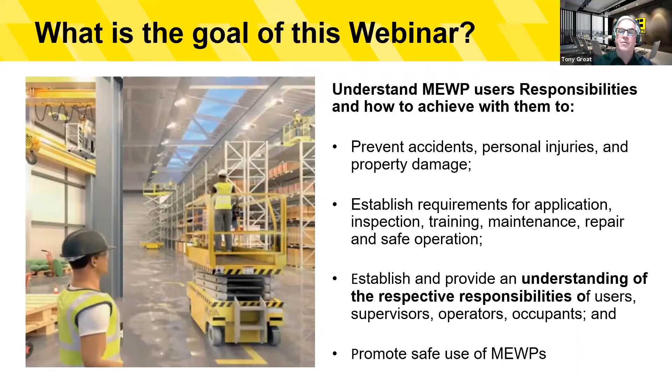While there are other responsibilities within the standards, such as for manufacturers or for owners of the equipment, we're really not going to address those during today's sessions and focus exclusively on the responsibility of users and their subsequent operating personnel. And all of this to promote the safe use of powered access equipment.

In addition to the safe use responsibilities in the standards, IPAF accident reporting data can provide MEWP users some insights into the range of issues that they must also consider when they're developing a MEWP safe use plan. Our 2016 to 2018 lost time incident report that you're seeing on the screen is part of that information that we have provided in our reporting.

Here you can see that we've identified 12 types of incidents that are known potential hazards. You can read more about the accident report by visiting our website that's on the screen here, www.ipaf.org/accident, and read more about accident data for your further information.

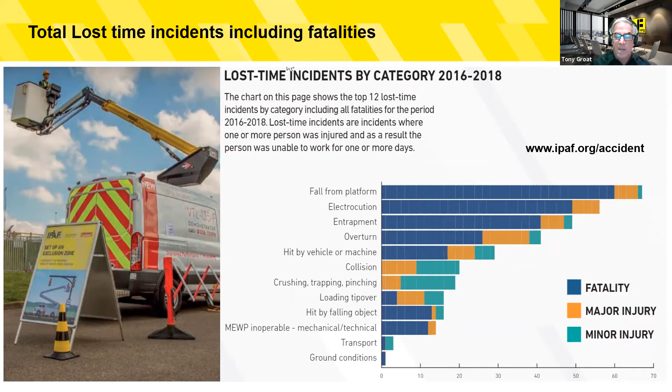So we're going to talk about industry standards, and standards are basically just an agreed way of doing things. Our industry standards are also commonly referred to as industry best practices.

In December of 2018, we published a suite of standards, the Design, Safe Use, and Training standards that went into effect June of 2020. So all of these standards are now in effect. And today we're going to focus in on the A92.22 Safe Use Standard and its respective training standard that associates how to train on that material, the A92.24.

These equally correlate with the Canadian standards, the CSA B354.7 for safe use and the CSA B354.8 for training. Very, very common, but there are a few differences, and we can point those out as we move forward.

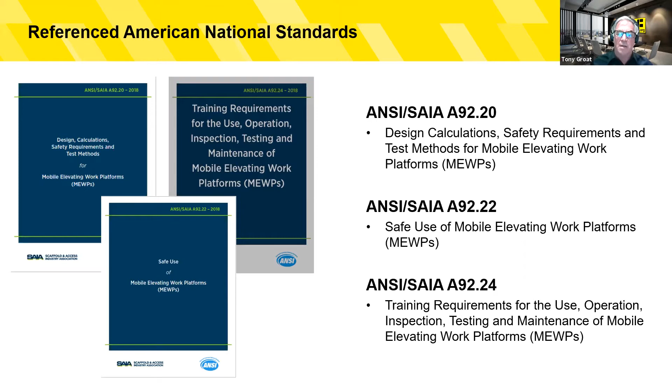So what we're going to do today is go through the standard and look at the different elements within the standards and give you an understanding of what those responsibilities are. And standards provide definitions that are unique to the standard.

As an example, a user is defined as an entity who has care, custody, and control of a MEWP. I can assure you, if you go to a Webster's dictionary and look up user, that's not the definition you're going to find.

So that's why you see the value of the definitions within the standards, because they provide a unique definition for terms that apply to our specific standards. Now, a user has care, control, and custody of it, and they're typically the employer of the MEWP operator. And a user may also have other responsibilities.

So, as an example, a dealer, who is normally a rental company in most cases, has their own set of responsibilities. We're not going to address those specifically in today's presentation, but a dealer is also a user because he has drivers and mechanics or even sales personnel who will operate that equipment. So they're a user, and they also own the equipment, so they have responsibilities as an owner.

And those elements could be true for any user. So if you have responsibilities outside of what we're going to talk about today, we're going to have to reflect on those responsibilities in the standards. We're going to just focus in on user responsibilities today.

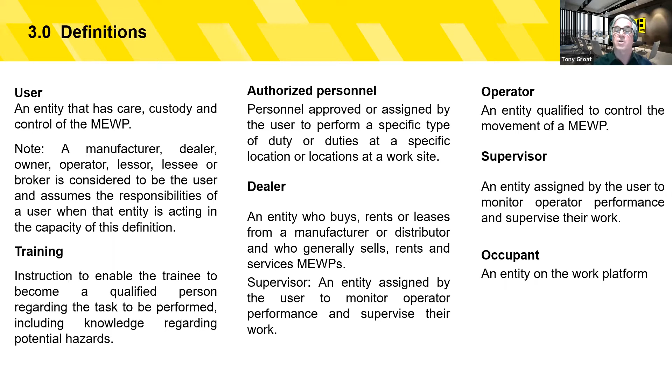Thank you, Tony. We want to start by describing that although standards provide the specific responsibilities, and as Tony mentioned, a compilation of best practices, we need to recognize that not all the conceivable issues that you may face on safe operation will be there for consideration. So it is important that we take this as the baseline, but there may be other aspects that you want to consider when you are planning to do your activities and making sure that equipment has the right integrity before it's selected to do the job.

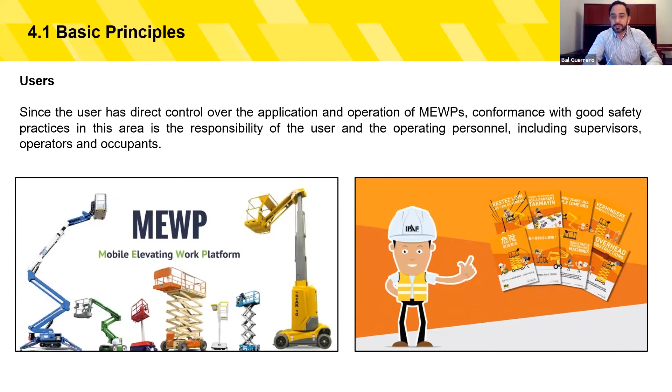And I know it looks overwhelming, but I want to just link this. If you think in general safety, in anything that is done at the workplace, you always are considering what is the risk that the activity I'm going to do will bring to that person doing the activity or a group of persons. What is the risk of the actual environment where I'm going to do the activity? What are those risks that will be out there?

The worker using tools and equipment, the conditions of those tools and equipment, and the way they operate, how does that affect the overall risk of the activity? And then knowing how to do the activity in the best possible way, which will translate into a proper execution and a safe execution. So training is so critical, knowledge and having the experience.

As Tony said, just going through the training doesn't mean that someone is a competent individual. And then there are barriers in case things go wrong. So I was giving you just a layout. If you go to general safety, that's how you think about how to make a safe use plan.

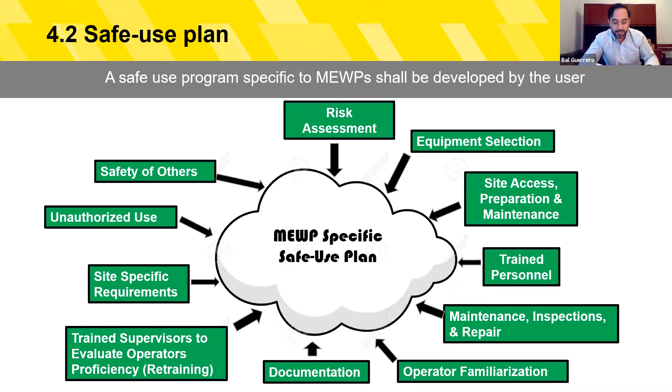So just wanted to make sure you hear a little bit of context on how what you see here, while overwhelming, may not be different to what you're doing to stay safe in other activities in your workplace. So moving to the next slide, Tony.

So it's pretty important to keep in mind that to have access to information, we've got to have a way to get that information in our hands, in the hands of the operators. In this case, what the standard is suggesting as the best possible way is having that manual in place that will allow that. This is critical as well for the familiarization with the make and model for the safe operation of this equipment. So moving to the next slide, Tony.

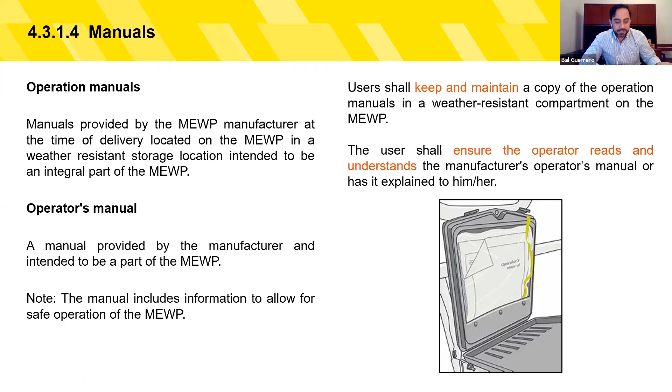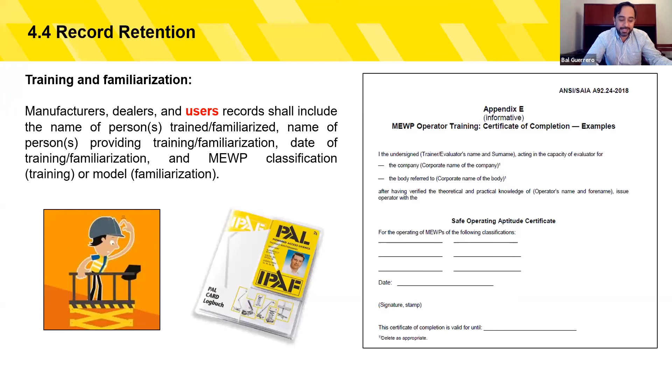While training records are pretty common and have established more and more as a best practice to understand people are aware of how to properly do an activity, familiarization is not necessarily as common to be documented. We can see here that manufacturers, dealers, and users should have this process established where there is familiarization, and this familiarization should be documented. So we have a way to go back and confirm that we systematically are providing the information that the people using the equipment needs to do it safely. Moving to the next slide, Tony.

Just want to make sure you see as well that, as in any other piece of equipment, but more critical because this piece is going to be providing power access, is going to be lifting people - modifications to the equipment may create an impact on the integrity of the equipment. That's why it's critical that any modifications should be in line with what manufacturers are saying modifications can be, and can only be done if manufacturers are actually providing approval to do those. Those are recommended by the standard and should not be done more than that for the owner of that piece of equipment. So just being very aware that any modifications can compromise integrity, and that can create a significant risk for the people using the equipment. It's key.

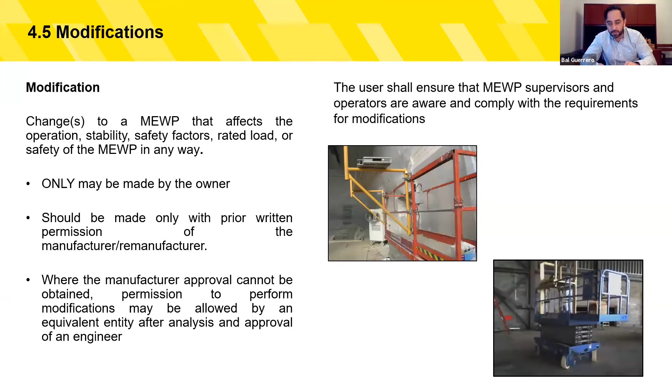Then moving to the next slide, as again, just translating what we are reviewing in the MEWP activities to general safety - maintenance of the equipment is also pretty critical. Maintenance and inspecting the equipment - maintenance is going to let us know if the equipment has the best chance to stay and remain safe when we operate on it. Inspecting them is going to help us make sure the integrity hasn't changed, and that can be a regular inspection, but then before the job that also becomes critical.

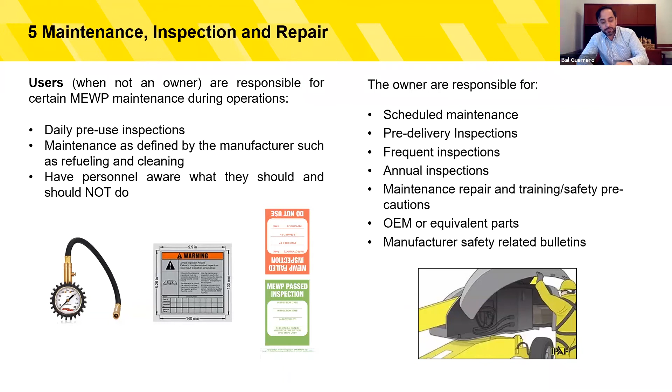So you can see here how there is responsibilities on the owner side as well as in the users. On the owner side, for example: scheduled maintenance, pre-delivery inspections of the equipment, frequent inspections, and the annual inspection - fundamental. But then the user needs to make sure, as I said, before the equipment is used, the daily pre-use inspection is a very important part. So maintenance inspections are critical, as in any other equipment as well.

Moving to the next slide, then we're talking about the context of risk assessment, and you know it's a key part of the operation. An assessment should include identifying what is going to be done, as we saw in the graphic, selecting the appropriate equipment for the task. That should consider as well the environmental aspects - can be the conditions of the terrain and other aspects as well. Then what will be the control measures that we're going to implement to stay safe for the activity we're going to do.

And the best practices that we know are more likely going to keep us safe. Those are the procedures of how to stay safe in that same activity. And that's combined with what we learn once we are in that environment. And what if things go bad? What if the equipment stops working or something goes wrong?

We need to make sure that risk assessment includes rescue from height, and that the result of this risk assessment is properly communicated to those that are going to be involved. The user is responsible to ensure that there is a risk assessment performed by qualified personnel. And as Tony mentioned, qualified has a definition, and we're going to continue talking about that.

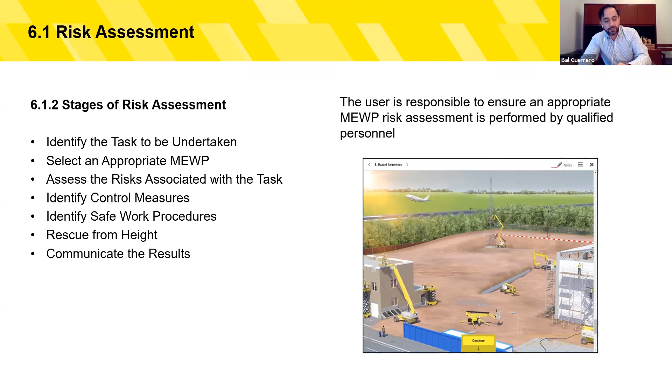Moving to the next slide, when we talk about personal qualifications and training requirements, too often training by itself is considered the only tool required to achieve the title to be qualified for a task. But that is just a piece of the equation. The ultimate goal is really the evaluation of the user, that the individual is qualified for the task that is going to be performed. That is the key, right?

Just training is the beginning of the journey, but qualifying that individual to actually safely operate that equipment is the end goal. So before training, users must ensure that candidates are both physically and mentally capable for MEWP operations, especially because they're going to be working at heights and with power equipment. And if the person is afraid of heights, likely they will not be a good candidate to be a MEWP operator. It's important to review that.

It's not the same, even if there is a MEWP operator already qualified, to be doing an activity at 20 feet versus doing 120 feet. That affects things differently. And even when they show you those credentials, that doesn't mean they are qualified to do the activity.

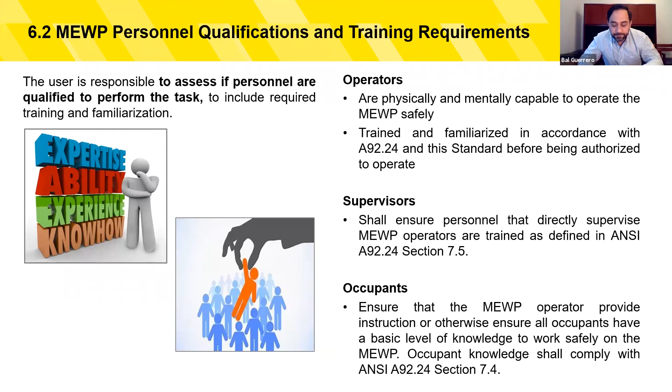It's important to think as well, moving to the next slide, that there may be questions. People may have questions when they are in their journey to learn how to safely operate equipment. So the operators need somebody who will answer those questions. That's why the standard mentions the user must have in their plan a means for the people operating the equipment to communicate any questions they may have, and ensure that the operator gets the information they need so they can operate the equipment safely.

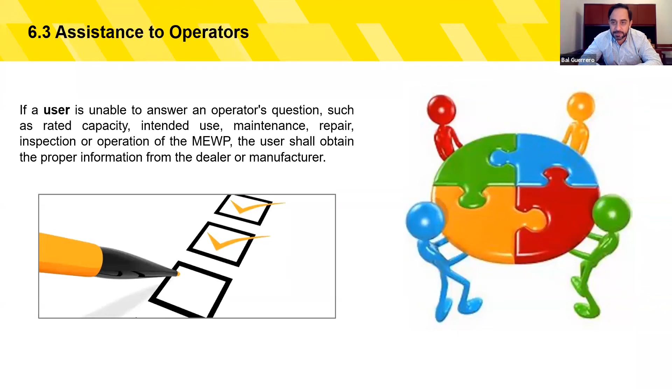So we just went through information that is critical on how to do a safe use plan and some of the training qualification aspects. But I'm going to pass it back to Tony now, who is going to cover other key aspects, including what we do before operation. Over to you, Tony. Thank you, Bal.

As Bal has just described, we've gone out and developed a safe use plan. We've done our risk assessment. We've gone out there and evaluated our employees and made sure that they're properly trained. And now let's go to work. So what do we need to do? What's the next step, even though we have those things in process?

Well, having a safe use plan is useless if the only one who is aware of the plan is the person who wrote it. So having it sit on the shelf in the office is a useless tool. The plan must be communicated, understood, and followed by all persons involved in the MEWP operations, to include MEWP supervisors, operators, and occupants as needed.

This is not a one-time responsibility at the very start of the job, but an ongoing one, as personnel can change on the job during the course of it. The user must ensure that compliance is taking place every day on the job. So there has to be an assignment of supervision to monitor, supervise, and conduct ongoing evaluations of the competency of the personnel on the job performing these tasks. This is all part of that safe use plan.

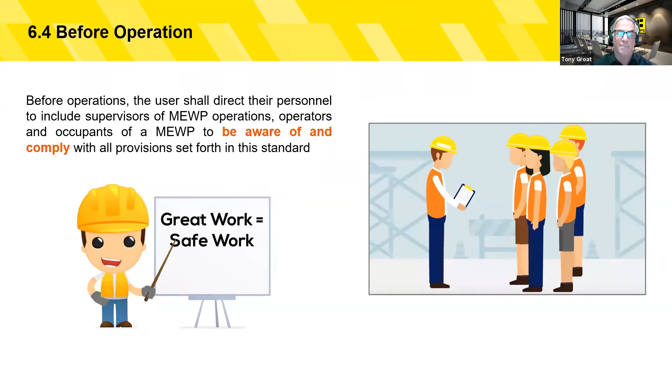So now that we also have that risk assessment in place, the risk assessment is we went to the beginning of the job and here we have it. And we all know that job conditions can change. So what you need to do is make sure that before and during the use of the operation...

Here's some of the language that you really need to take in if you're a user: the user shall ensure, and the operator shall perform. So ultimately, it is the user, the employer's responsibility to make sure all these things are being done. So even though we have a trained operator, the issue isn't that I've trained them and now I can wipe my hands and move forward.

It's that you need to make sure that these things are being done. In this particular case, making sure that a workplace inspection is done before and during daily operation. The standard details a bunch of items that can be taken into consideration while you're doing that, and that's part of operator training, that those items will be taken care of.

But if I give you an example, if we end up having crane operations going on at the same time that we're doing our MEWP operations, and they're going to have to be maneuvering material over our head, then we get to the point where it's okay, now we've done our workplace inspection. If our risk assessment didn't detail for that operator what to do when this situation happens, we're at a standstill. So it has to provide that level of detail, or we have to give the instructions to the operator that says, hey, when this happens, you need to stop your operation and go to your immediate supervisor to detail how we're moving forward.

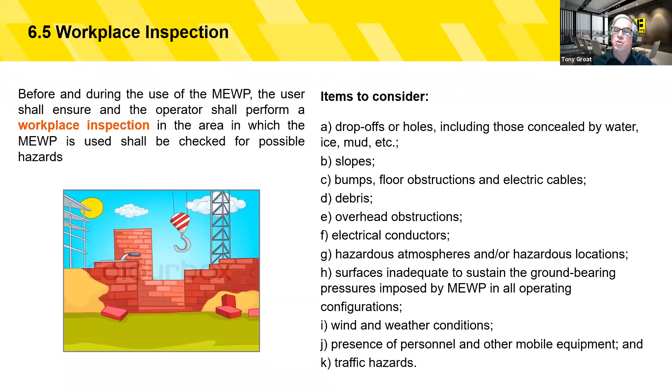So understanding that we have risk assessments, and then we have the daily workplace inspections, you also need to have processes and procedures on how to apply those.

So that's on the daily process, but prior to each day's operations, what needs to happen? Again, here's that language: the user shall ensure - so again, user responsibility - and the operator shall comply with, prior to each operation. And this is what I would characterize as standard operating procedures.

So if I'm a MEWP operator, we have potentially stabilizing devices, outriggers, extendable axles. They need to be made sure that they're out and in place and properly set for operations. Guardrails are on the machine - we need to make sure that the guardrails are properly in place and the gates are closed, the loads are distributed, that all the occupants have received their occupant knowledge, and that if there's any type of personal fall protection that is required, that's in place and attached and used.

So here's the things that can again become commonplace, and I could give you examples of operators who are wearing personal fall protection and have it connected to their D-ring as opposed to connected to the anchorage on the machine. So these are things that we need to make sure take place each and every time during operation.

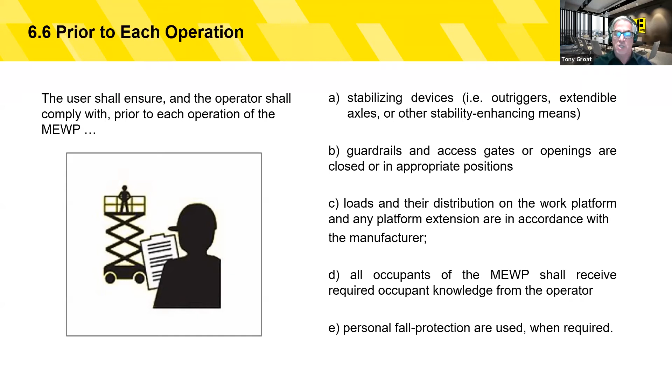Here's another item that's stuck in the standard that is a user responsibility, and it really falls into your risk assessment. But it's a very unique one that was highlighted within the standard, and that's that the user shall ensure that if a MEWP is being used in what's known as a hazardous environment - and the hazardous environment by this definition is where flammable or explosive gases or particles are present. So too often people hear hazardous environments and say those are places where there's a hazard. Well, this is really specific to flammable or explosion type situations.

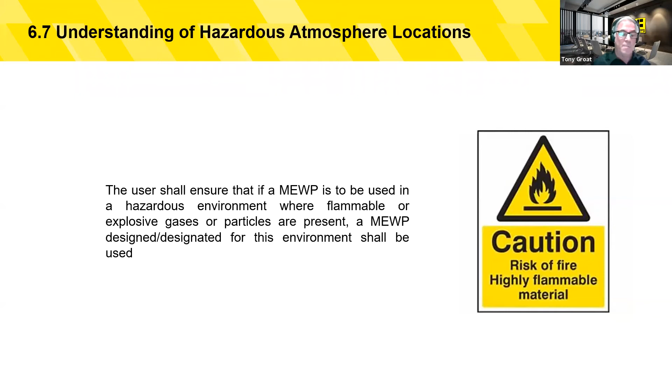And in those cases, none of the machines typically are designed to work in those areas. So in the selection of the equipment in these environments, they need to get a machine that is designated to work in this environment before they allow anyone to work on that equipment in that area. So again, user responsibility, very specific and maybe niche, but one of those things that you need to be aware of because there are those applications out in the marketplace.

Now we're into this huge bucket in the standard, and the huge bucket is specific requirements for operation of a MEWP. There's a lot of detail here. So here are two of the first items that are on here.

The first one is fall protection and weather considerations. With most equipment, fall protection requires full guardrail systems to address potential falls from height. That's true for all MEWPs too. However, personal fall protection is required in addition to the guardrails for all occupants of Group B, or what is called a boom type MEWP. Training will inform you on what this is and how you are supposed to apply it. But again, here's a very specific element tied to MEWPs: full guardrail, and I also need personal fall protection on Group B type machines.

If you're in Canada, they'll also have a requirement where personal fall protection is required on all moving MEWPs. So you need to know what those requirements are in the area that you're working.

Now we have weather considerations that are part of these requirements for operation. Again, we have this wide range of items such as wind, lightning, ice, and storms to consider. Very specific to MEWP safe operations is wind consideration. You need to be aware that we have machines designed for zero wind, indoor operations only, requiring zero exposure to wind. Those that are outside have to be in an area exposed to a maximum of 12 meters per second, or 28 miles per hour.

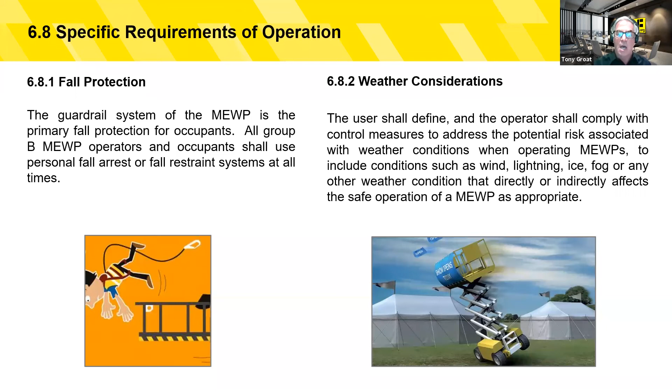Now, as I told you, there's a lot in this bucket, and right now Bal will be throwing stones at me because I violated one of the rules for good presentations, which is putting too much information on a slide. But don't worry, I'm not expecting anybody to read this, and I'm not going to go over every line item one by one. Really, what I want you to understand is the depth and breadth of the items to be considered in safe MEWP operations. These are the things we bring up when talking to MEWP operators, and they are things we will include now in the new MEWP supervisors courses. But again, these things need to be very clear on who's doing what and when.

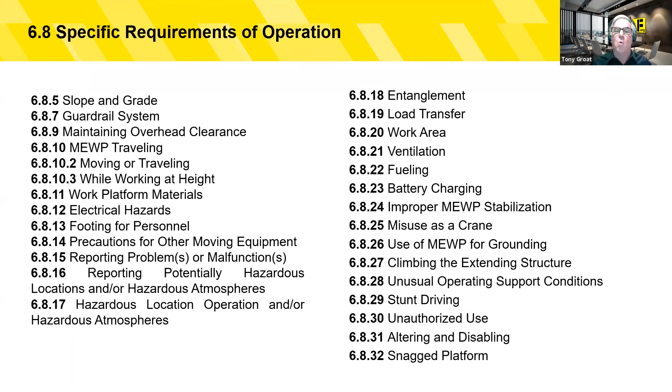Again, here it goes. I couldn't even fit all of those on that one slide, so I have a mortal sin on presentations times two. But this slide completes that long list of requirements that must be considered. Here is another example of how these are MEWP specific in nature for planning.

And here's one: exiting an elevated work platform. Now, this has long been a forbidden no-no. Keep your feet firmly on the floor of the platform, and we never want to climb on any of the guardrails. Getting out of that work platform when it's elevated has generally been a monster no-no in the industry. However, I will guarantee you that any of you who've been in this industry long enough have seen, with some frequency, people exiting an elevated work platform.

Entering or exiting an elevated platform at height may be allowed through a procedure addressed and provided by the manufacturer or qualified person that meets the guidelines in the standard. So there is now information that this can be an acceptable procedure, as a manufacturer or qualified person can define, based on the risk assessment, that this is the appropriate equipment to do it, and this is the only way we can safely get to these workplaces.

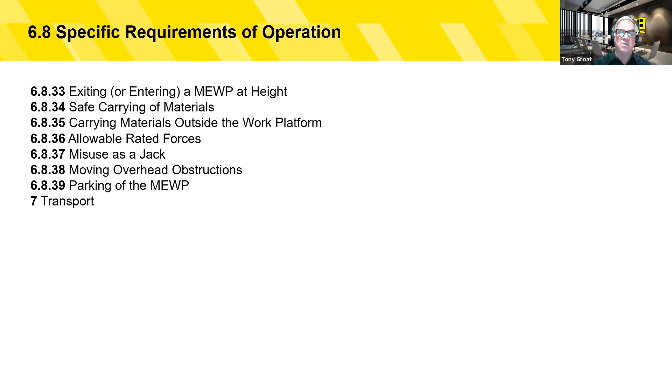Yeah, thank you, Tony. And if you click one more time, I think there will be some pictures there that try to show that, going back to the training aspect, and the importance of knowing how to be safe.

All users of the MEWPs should either train and familiarize, or ensure that the people who are going to be authorized as operators and occupants of the platform are trained and familiarized according to the standard for training that is now available, which is A92.24. Those records have to be retained. The details of the requirements are something we're going to review together now.

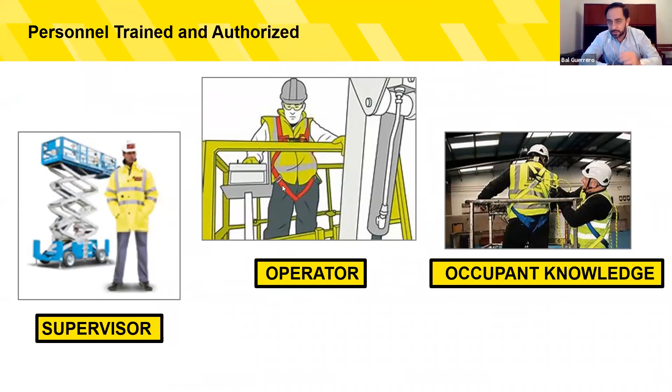Moving to the next slide, I have to tell you, being a safety professional for more than 20 years in oil and gas, power generation, and construction, this standard in particular is pretty exciting to me. When you're a safety professional trying to help people stay safe in the field, it's obvious right away that having the right information, workers knowing how to stay safe, is a big step towards preventing accidents. The definition of what good training looks like may vary depending on the industry or activity.

This standard in particular, ANSI A92.24, is really helping us understand the training requirements for use, operation, inspection, testing, and maintenance of the MEWPs. Having all those best practices included in one place is really significant. What will move the needle to keep workplaces safe is actually using this content and making sure people learn this minimum structure we're going to review right now. Before we move to the next slide, in the previous standard there was a training requirement, but nothing as specific with guidelines as we have now.

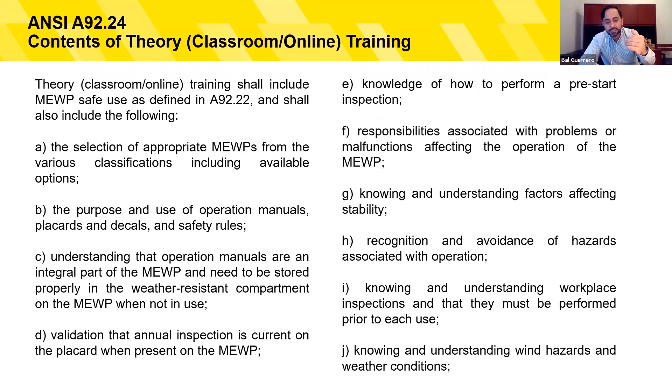But as I said, the idea is not to read all that, just to let you know that the reason all these points are inside the training is because they link to the safe use plan and how to connect the different risks that individuals can face, and how to teach them to recognize that. So we move to the next slide, Tony.

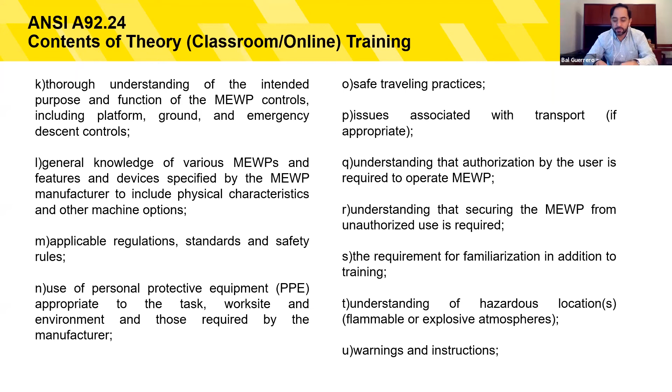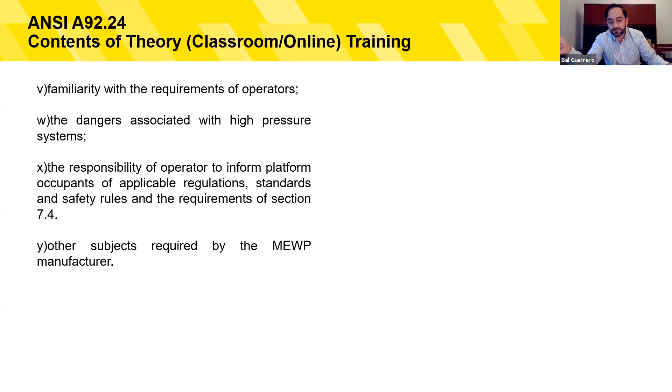Moving to the next slide, we'll see that the standard also includes the importance of training operators on their responsibility to communicate with the people inside the platform, and how they need to communicate so they stay safe. So I just wanted to make sure we went through the content, and you see how now we have a clear guideline on the minimum standard to make sure that the person being trained learns the key things to be safe when they operate. Then moving to the next slide, obviously that's all theory.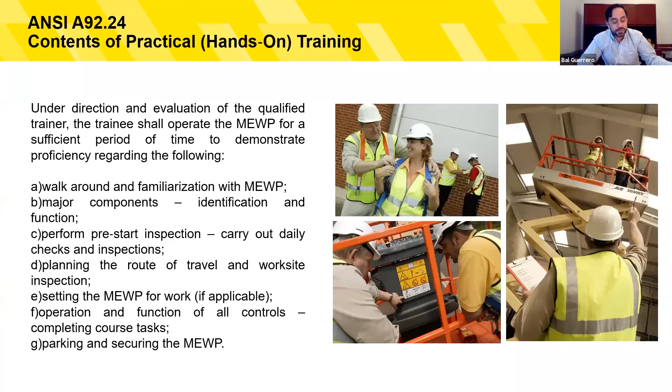So I wanted to make sure you saw there are also minimum requirements on that practical evaluation that are pretty valuable if we follow them, for that person to demonstrate in hands-on training that they can actually be effective using what they learned in theory.

Those are some examples, but retraining, as with anything of major risk—because we have to remember the activities done with MEWPs represent high risk—making sure they know, and having scenarios where we go retrain the operator, is critical.

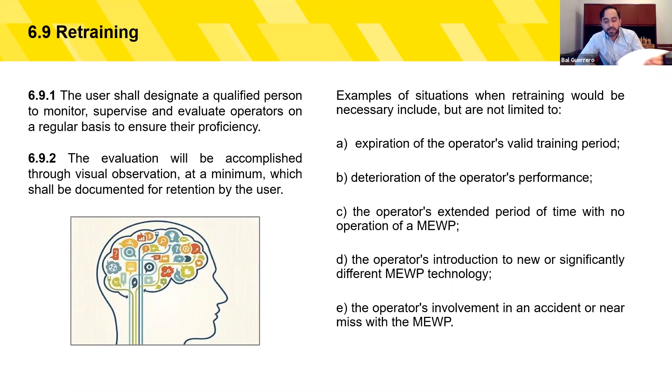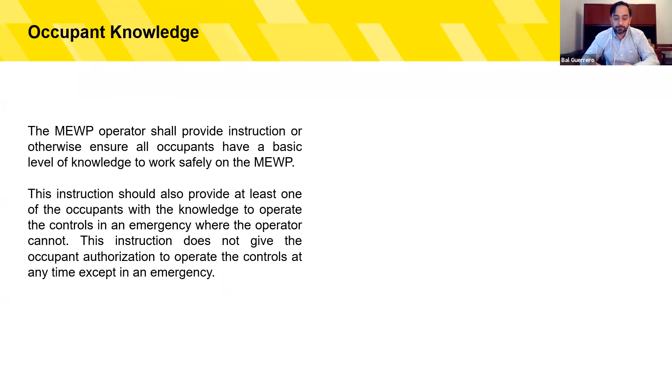Finally, moving to the next couple of slides, the standard goes even beyond, talking about not just the content for the training, but that the person delivering the training should have certain characteristics.

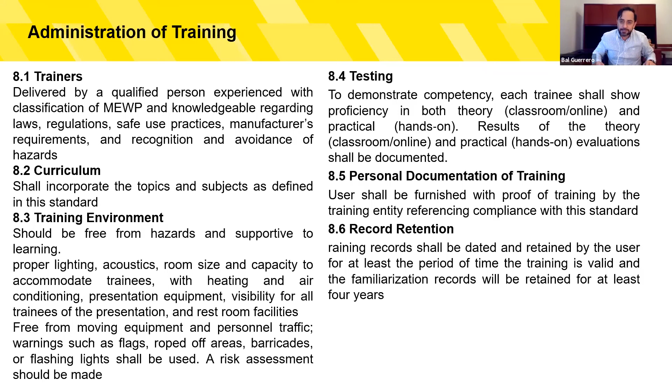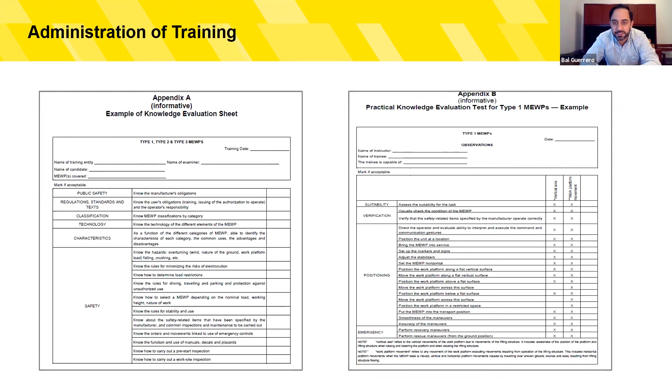Finally, the last slide on this section: the standard even goes to provide some examples of templates you can use for the classroom and online training for those taking the class. On the left you have a knowledge evaluation sheet, an example provided by the standard, so you can review and confirm they understand what has been taught. Then the appendix on the right is the actual practical evaluation.

It's pretty useful to have this in the standard because it sets a minimum bar on how we confirm knowledge and confirm practical utilization of that knowledge with the people involved in MEWP activities.

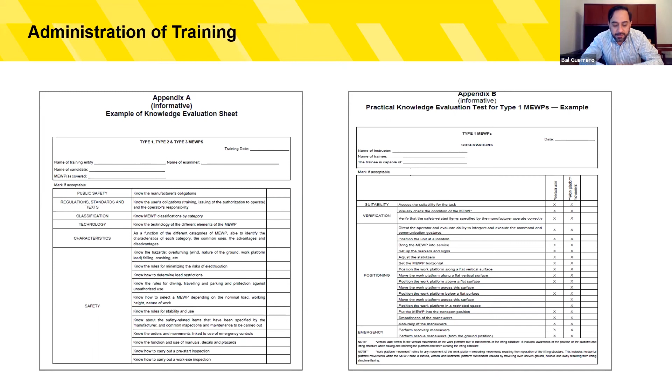And with that, I'm going to pass it over to Tony to wrap up the session. Over to you, Tony. Thank you, Bal.

I'm gonna have to calm you down a little bit. You're getting a little excited here when we're into that training area. Yeah, that's right.

Well folks, here's kind of the summary. Our goal is to support the safe and effective use of mobile elevating work platforms, but that requires action. The ANSI A92.22 safe use and A92.24 training standards provide clear responsibilities that, if followed, will reduce a user's risk and prevent accidents, personal injuries, and property damage.

To implement your responsibilities, you must develop a safe use plan. You see how much was involved in everything we talked about. It took us nearly an hour just to summarize some of the bullet points that are part of safe use in our standards. Today, all we did was raise awareness of these responsibilities.

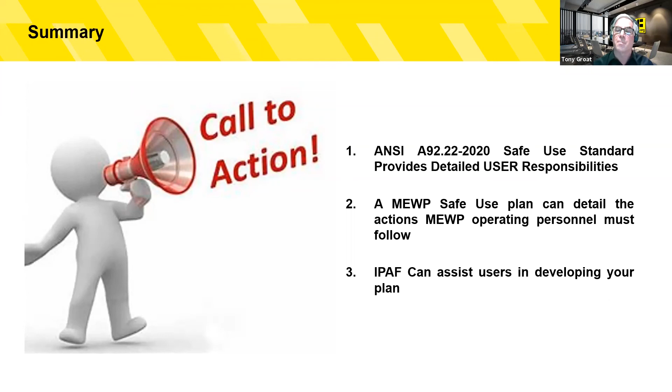It's up to you to take action. We have a series of webinars that we suggest you plan on attending to help guide you in the implementation of this plan. We're here to help you invest your time and do it over a period that makes it a doable process for everybody. So we encourage you to mark your calendars for this series.

Our next webinar is going to talk about the development of a MEWP specific safe use plan. So all of those elements in that cloud visual that Bal went over with you - the complete risk assessment, equipment selection, site assessment and preparation, training for personnel, maintenance, inspection and repairs, considering the safety of others, unauthorized use, site-specific requirements, training for your supervisors, providing occupant knowledge, and making sure all this is documented.

That's all a safe use plan. It's a lot, and we're going to provide you with guidance on how to do that, along with tools and templates on how to create it.

So we would ask you to consider joining us on April 22nd. As we move down that path, taking those pieces and putting more meat to the bone, on the 27th we're going to be providing standardized, compliant, reliable training.

So Bal went over all of these components. As we said, we have a training requirement passed - now we have a training standard. What is standardized training? How are you going to have one person trained in an hour, someone trained in 2 hours, somebody taking a day to get trained? What standard are we following when you have those variables?